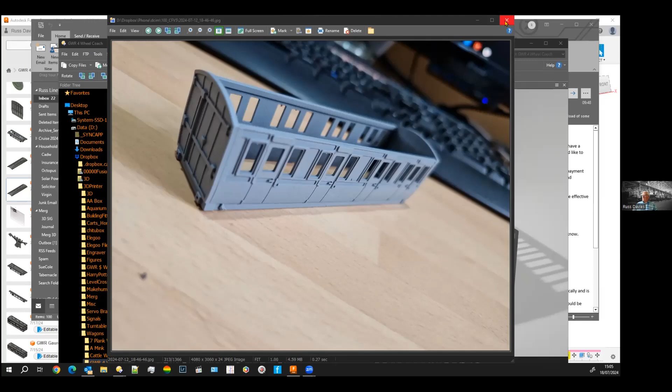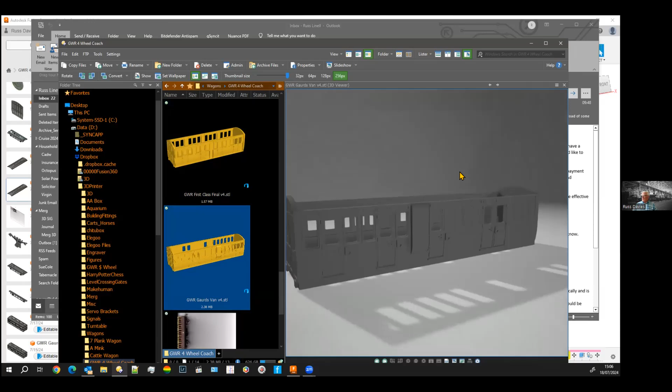I'll get rid of that, and then you can see here I've got this one here, whoops, which is a third class one, and somewhere down here is the guard. Well, no, that's the first class one again. There's the guards van there. Now they've been very easy to do. So I'm going to go through the one just to show you the technique I've used so that I can produce 3 wagons very quickly, really.

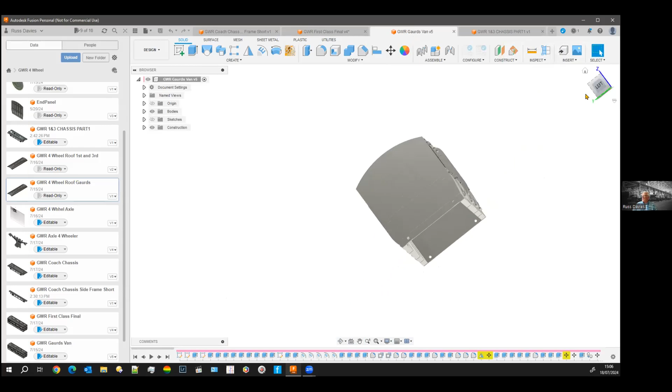So let's get back into Fusion, and I'm going to look at the first class final. So I'm not going to do the drawing, I'm going to go through the timeline. So the first thing is to create the profile of the side, and basically I show you on this one is this profile here. So it's creating that profile to get this inside bit, and let's go back, and that's the profile I've done.

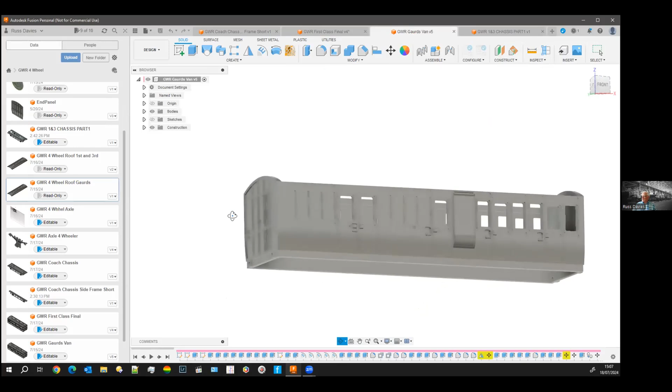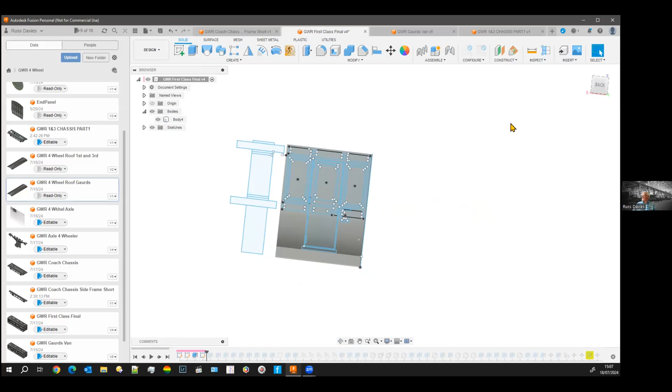So moving on from there, we then extrude that out, but I've only extruded it out to cover basically a door and 2 panels, and hopefully it will become clear why, because then by doing it in a panel section I can multiply it. So that's our basic panel, and then we put our sketch overlay on it. Now just ignore for the moment what's on this left hand side. That's used to create another panel to generate my first class ones. But let's just look at the third one first.

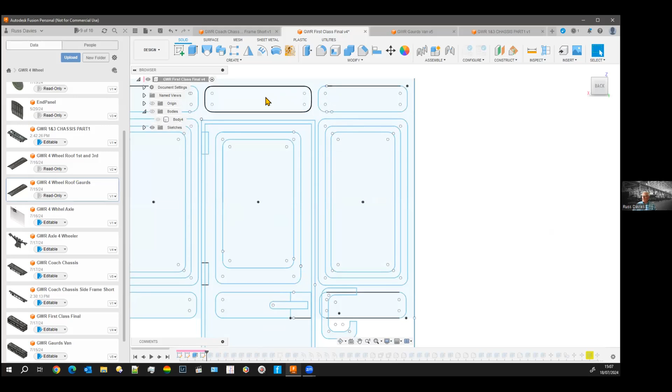Switch off the body, and there's the sketch. So what we've got there, we've got the inner window bits, which will be the mahogany parts of the GWR, and then you have an outer one. You've got the main body there, and you've got these inset panels and the door frame, hinges, door handle, and handle to help you on board. So from there, put the bodies back on again.

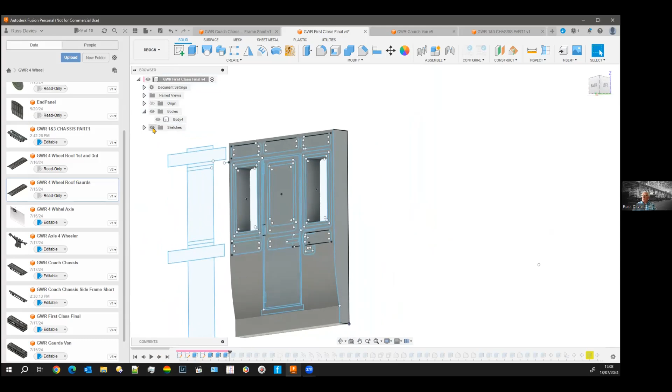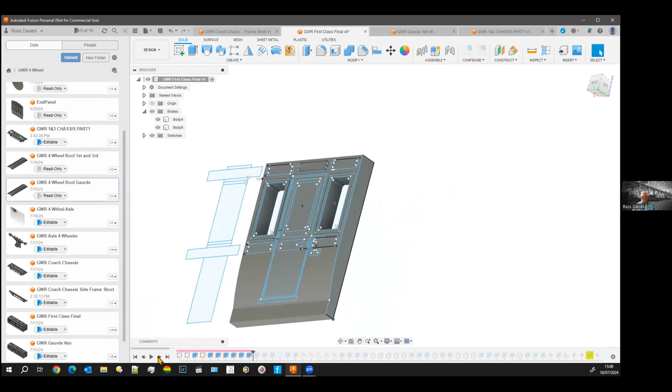We start to generate our, you can see there, let me go on an angle. So we switch off the sketches a moment. What have we done here? There you go. You can see now where we're ready to make our cutouts. We've already pushed that one through and done that one. So let's go through our cutouts. There's all our cutouts done.

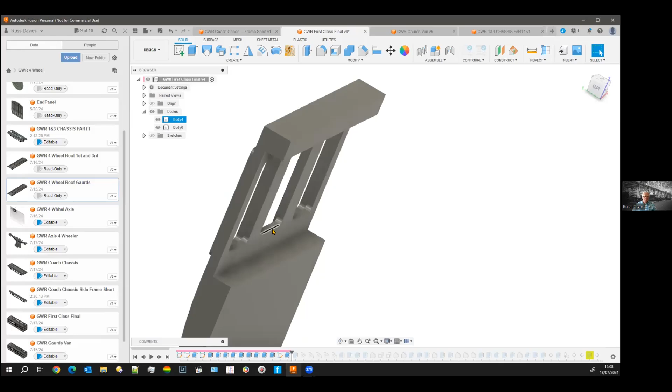Now the next stage on that is I cut out the back. Now there's 2 reasons for cutting out the back, obviously, because if I didn't cut out this back, this web here would extend here, and that's too thick for the window, obviously. And by doing a cutout, that then allows me to clip in a piece of perspex quite neatly to act as the window glass, okay?

Now at the moment we have all our recesses. We have our little fancy bits here, our little bit sticking out here, which is sort of a vent thing that these coaches had, and we have the recesses for the wood. So that would be the mahogany part, as is with the opening closing window, and then the recesses.

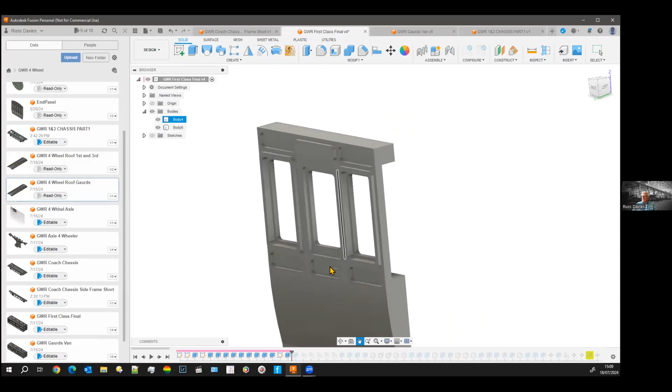Moving on from there, put the sketch back on. What I haven't done at the moment though is the door, and this is where John raised his question, is how I did the door. Well, the door is quite easy because the door is the emboss command.

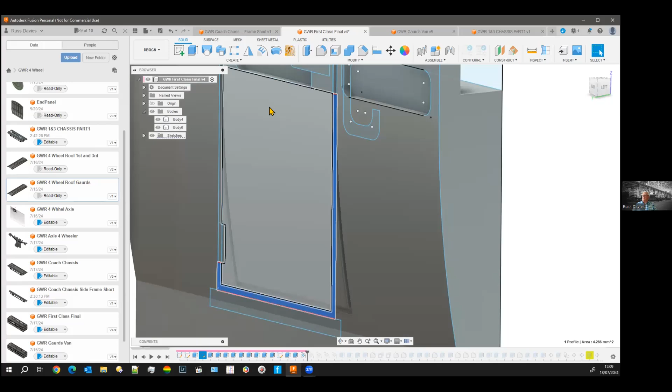And if you remember with the emboss command, we highlighted the template that we wanted, we used the emboss command, and then we chose the face that we were going to put it on. And you've got that face, which obviously is all the way up, and that embosses the door all the way round. Turn off the sketches, turn off that one as well, cancel.

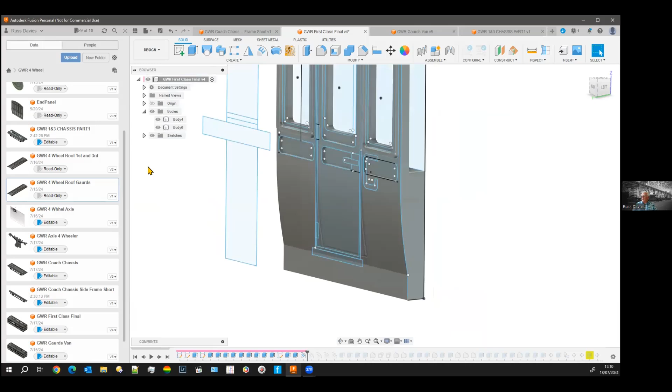So you can see then the door has got a slight emboss. I think it was about 0.2 by 0.2 millimeter. It's just enough so that the printer will create a line there. You obviously don't want a massive gap. And if you're on N gauge, you want even less of a gap. So it's just to create a line in the plastic, if you like.

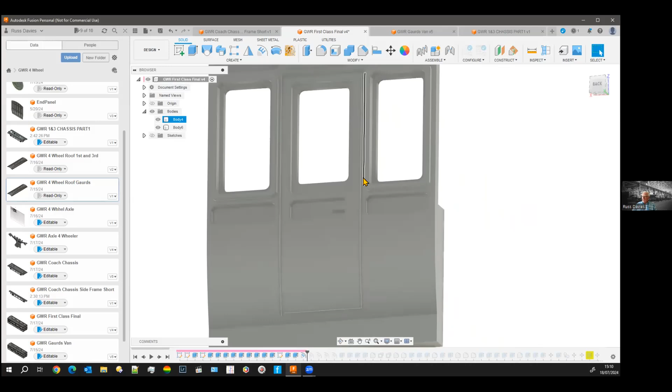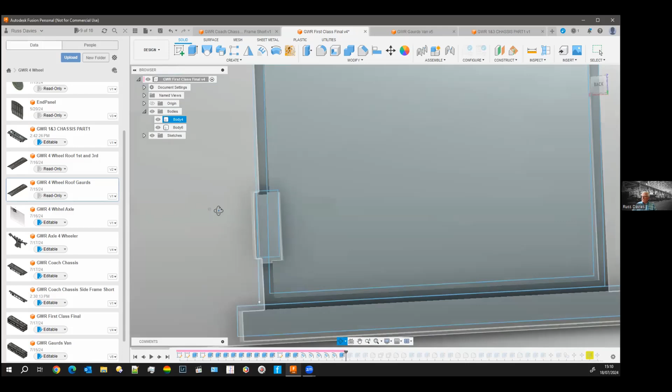Moving on from there, that's a second emboss and a third emboss, because now, apart from the door frame, we also had the hinges. And there's a pile of those, because if we go back to the sketch, we've got several hinges there. And they all need to be done separately because they're going back to different surfaces. And then there's a bit of extruding to level them all out. And put some curved edges on.

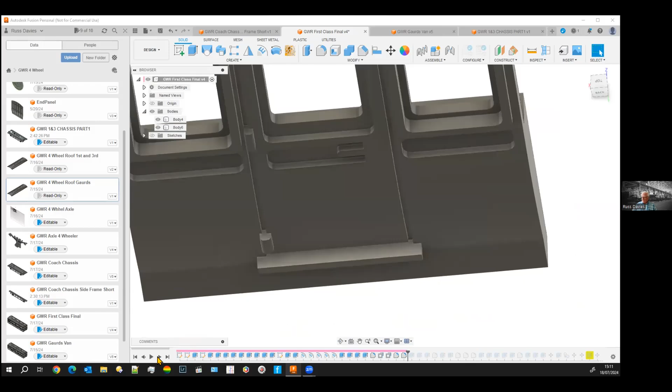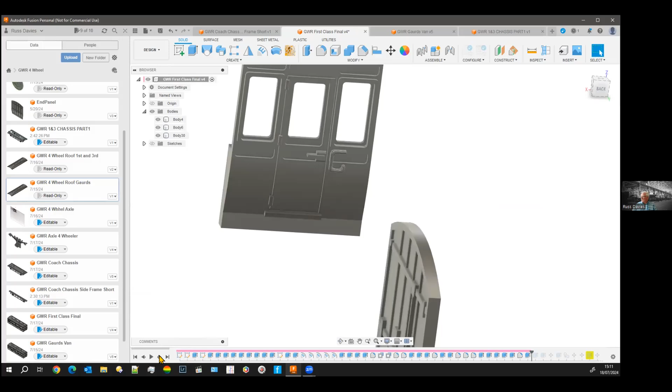Okay, now I'll move up a bit quickly now, because then you can see now our finished frame is taking place. So that's our finished panel. That's the end panel I've done. We'll ignore that for the moment. And then I fit the end panel on. Again, Mal did this quite recently. You can either use the align command or you can use a rigid joint command. Both will give you the same result.

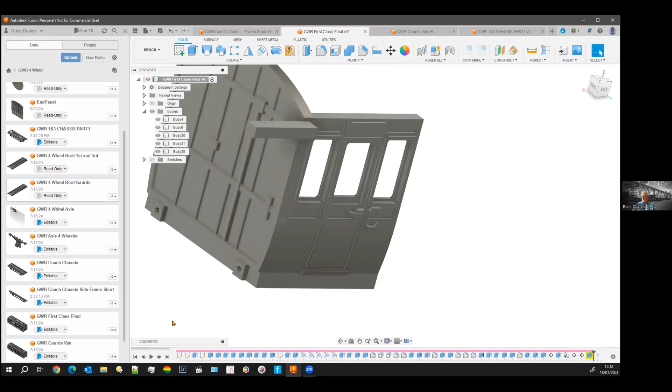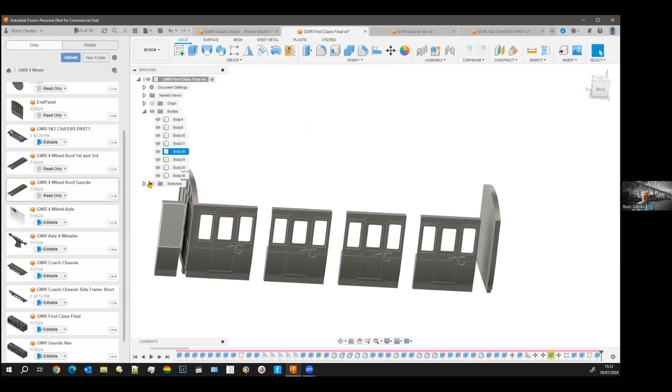Then we go through a yellow marker, John, which I tend to ignore. And then I put in copying the panel. And that's the panel copied up there, and the end panel ready in place. Now remember at the beginning when we looked at the sketches, we had this little sketch over here on the side. You can see now what it's for. It's to create a blank panel which fits in here.

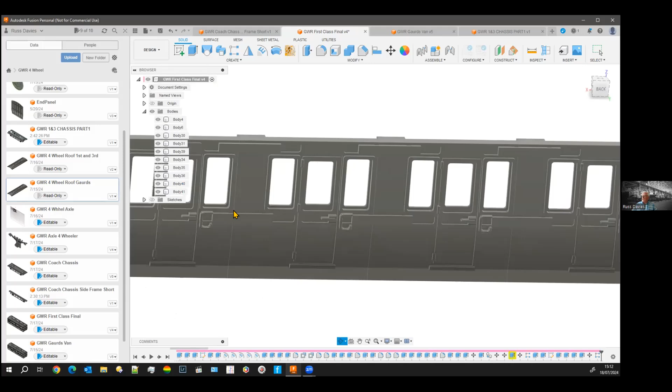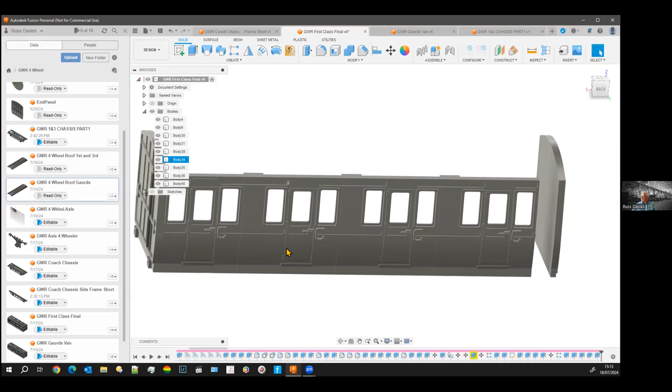And there's the blank panel that fits in there. It needs a bit of tidying up here then to take these bits back into there. And you just do that with the extrude command again. You see it's gone in that one, and that one's gone. And then you do the same down here. And that's basically that one side done. And then we keep going again. This timeline goes on forever.

And then this side panel is mirrored on the other side. And then it's moved away because it's mirrored and a new body is completed. Then it's moved away to the other side. And that gives us our completed coach body ready to go.

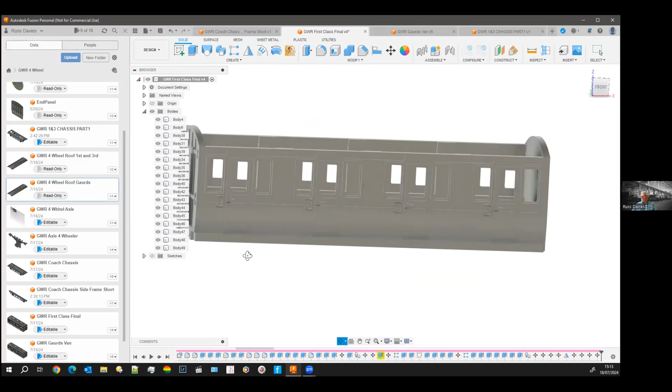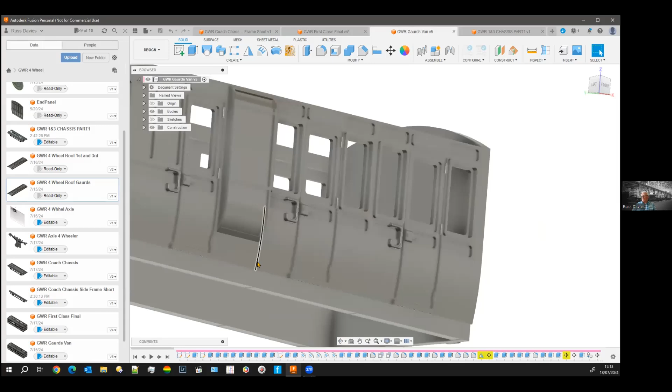Now, if I go on to the guards van, I used exactly the same panels here. You can recognize then the door, 2 windows. I repeated the panel here, but only used half of it. So I copied that panel over. Then with the extrude command, reduced it down so it was just one door and the panel. And then we've got a blank piece in, and then these up here again, the same panels.